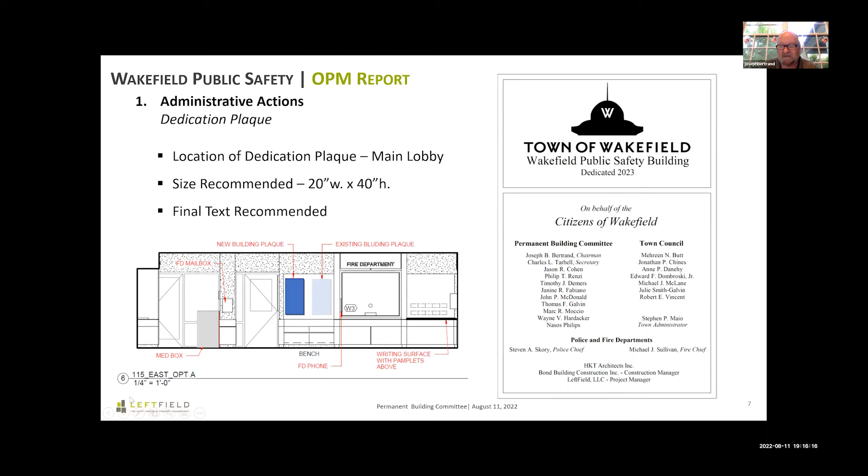And then just the next meeting that we have scheduled for the public safety building is September 8th. I don't see a need for us to meet along with the high school on August 25th, which is their next meeting, so we'll hold September 8th for the public safety building. Thank you.

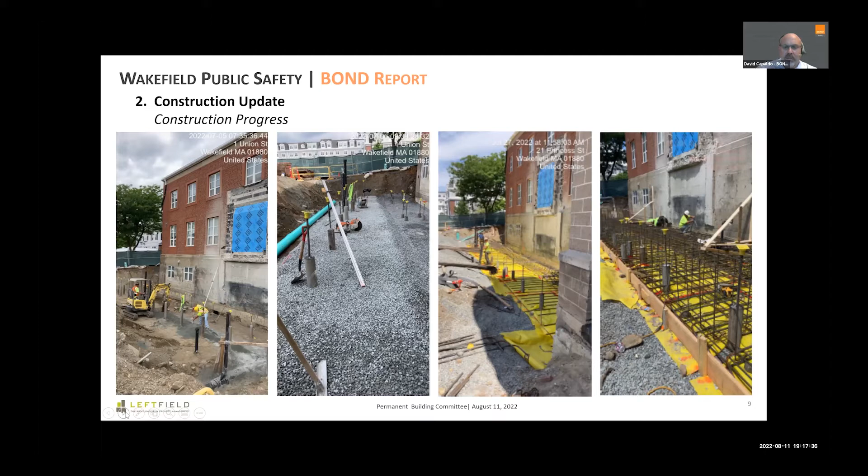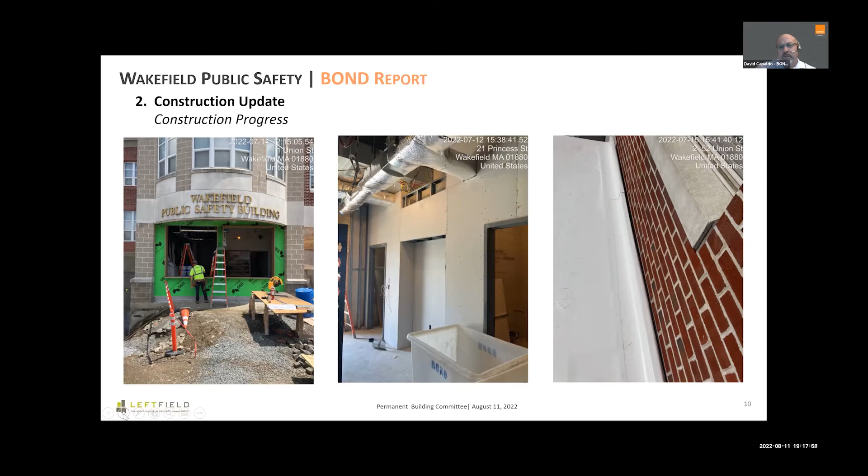Sure. So the last photo, I think he was trying to explain that was prep for the mud mat. That is essentially the first basement level slab on grade as well. Probably go to the next one. That's lobby progress, working from the outside, the first shot, inside showing drywall going in, and all the MEPs are up. And that last photo, I think, is the vestibule roof in place. Yep. Kind of an interesting shot there. And that's more interior progress at the lobby and dispatch areas as we were moving through the last few weeks.

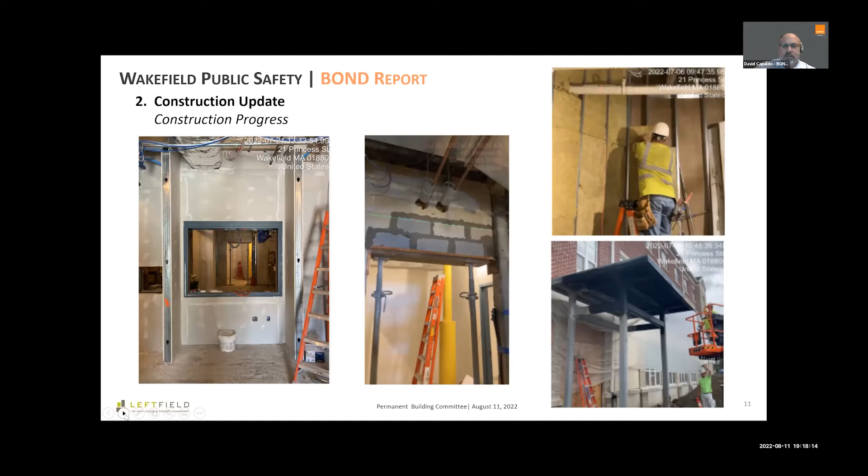And then from a big picture perspective, just to give a sense of where things are going. Right now, the addition is progressing very well. We're essentially right on track with where we had hoped to be based on our last schedule update. The lobby is progressing well also. But with the lobby, there's a couple of items that we've been trying to do some temporary workarounds on. And I think we'll definitely get the police department in the lobby roughly close to when we anticipated.

We may continue to use the temporary entrance for a couple additional weeks while we finish up the vestibule that had some lead time issues with the exterior glazing. So we're working as a team to come up with the right approach for that. But I think everybody on the team is on board with that progress. So we'll update at the next meeting exactly what the official opening of the front entry will be to the public.

All right, Dave, when do you think the turnover is going to be with the dispatch and everything? We're trying to figure out exactly when it makes the most sense for the police. We've got an electrical turnover. We have to maintain 911, that kind of thing. So I would say over the next 7 days, we'll probably have a few options to consider. We'll probably nail that down at our next meeting or so. And by the time we report back to the committee at this level, we'll have an absolute definitive date. But it's essentially close to the schedule we're on.

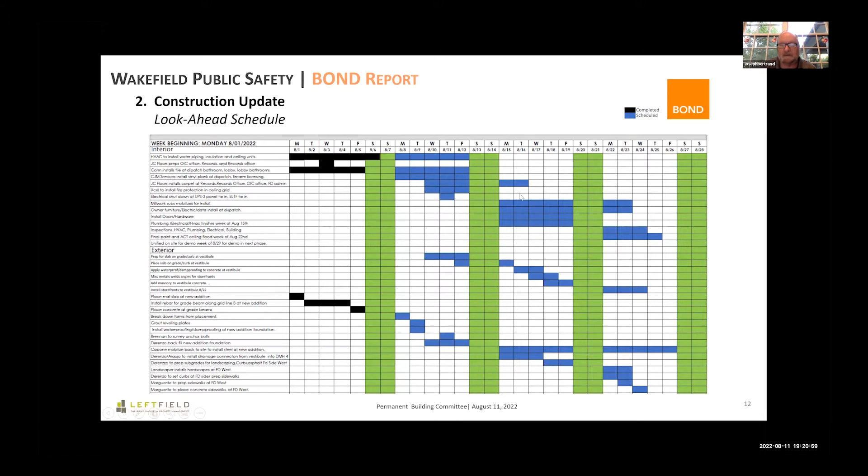Hearing none. Lynn, is there? That's it for the public safety building. Okay. Thank you, guys. Thanks. Good night. Thank you. All right.

Can you see the high school? Nope. Okay, hold on. I think I jumped out of sharing. Okay, can everybody see? Yep. Yes. Okay.

First up on the agenda is administrative actions. We have several of those to go through. Then SMMA will give us a schematic design progress review. Actually, at the end of the administrative actions, we'll turn it over and introduce Bond as the new CM for the project. And at the end, we'll do a quick schedule update.

So I'm going to let Frank start. Great, thanks everyone. So I'm Frank Hayes. I'm the president of Bond Building Construction, also an owner of the company, and thrilled to be selected for this project. I am a Wakefield resident. We've got 5, I think, Wakefield residents on our team, which is phenomenal, because the project means a lot to us and we all care and want to absolutely do the right thing. I'm going to say just a little bit about the company for those of you who don't know Bond, and then turn it over to Dave and Jerry, because getting to the logistics and how we're going to build this thing and show you that sequencing is really the interesting stuff.

But you can see our numbers on the screen there. We were established in 1906. We've got 6 offices throughout New England. Right now, we're running a bit over 750 employees. We do self-perform quite a bit. We are signatory to carpenters, laborers, operating engineers. So we do a lot of self-perform with our civil utility team, which could be valuable on this project, especially with the Hemlock Street alignment, maybe the culvert work, some early utilities, things like that. We also self-perform carpenter and labor trades.

And the way we look at this is if it can add value to the project, especially in this time of kind of labor shortage, then we bring it to bear. But obviously, that's all 100% transparent, and we don't force it down anyone's throat. It's there if it makes sense for the project. This will be our first high school project, and I think it's important to put that out there. We have an amazing team who has built every kind of space that this school actually contains, and we've done many projects of same size and scale, and very similar, but again, our first true high school. So wanted to just point that out. We're 100% comfortable with it, and looking forward to really getting to know the SMMA team.

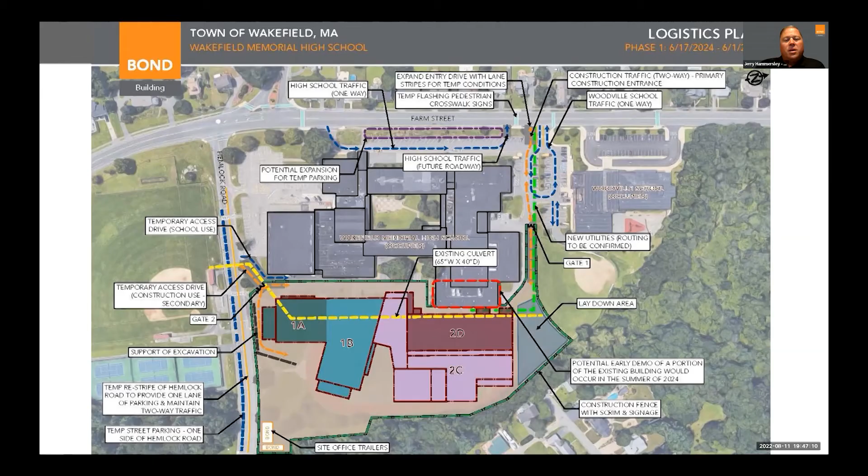Also addressed here is the traffic flow in and out of the site. So we plan to widen and potentially separate the curb cuts between Woodville and the high school to allow better flow, separating Woodville's traffic from the high school traffic, and it makes the drive a little bit wider for trucks to get in and out as well. So the road would only be used in that area outside of drop off and pickup times, similar to what we did at Galvin, to eliminate any disruption to students coming and going from school.

So we also addressed the sequence of how we plan to build the job, working from the Hemlock side of the site over towards the softball field. The building does account for most of the real estate on the site, so it's very tight. When we're establishing the site perimeter, we will address that kind of stuff as well. And then lastly, the Bond and LeftField trailers are up on the hill overlooking the site. So they are able to remain in one location throughout phase one by doing this. And then they'd be moved down to the bottom of the hill for phase two.

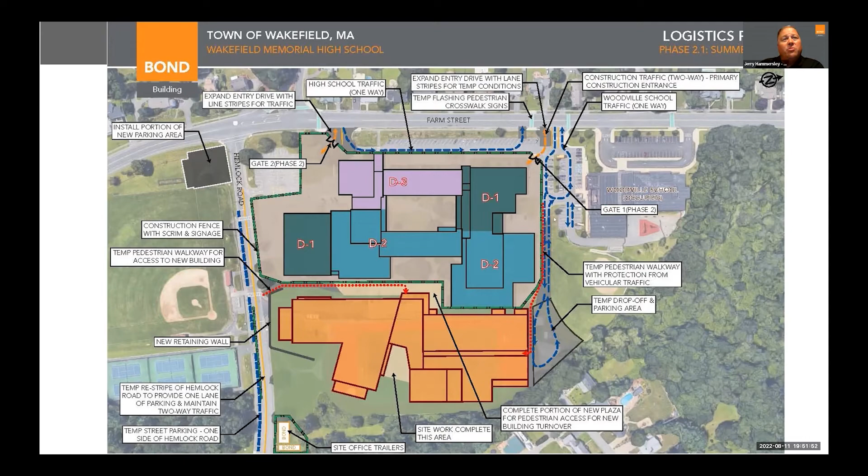So with this sequence, with the demolition sort of getting started, we would be working from the new building towards Farm Street. So we had to address student drop off here, putting the student drop off between the high school and Woodville, using what we did have as lay down area as a turnaround for the parents dropping off and picking up. And our suggestion here would be to utilize Hemlock Road for buses for the initial opening of school until we can get the new front plaza developed.

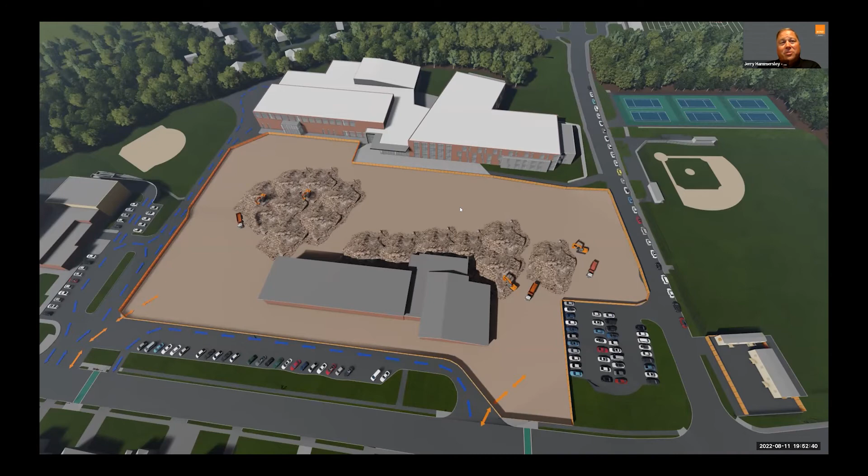This work starts in June of 26, first with abatement and the demolition of the existing building. Unfortunately, there's not enough time schedule-wise in the summer of 26 to completely remove the old building and then build the new plaza that creates the main entrance to the new building. So as we started the demolition work, we'd work our way from the inside out, making way for the new hardscape to be established and start that plaza construction in September of 26, and then complete that area ahead of the frost in November of 26, making it available for pickup and drop off, hopefully by mid-November.

At that time, drop off and pickup flow for both cars and buses could shift onto that new area, and this also gives back 68 new parking spaces for school use, and then the remaining spaces would be completed where that turnaround was. So there's 5 3D slides here that go through the demolition. The fourth shows the new plaza completed in November with the new Beasley track and field under construction. This will likely be started with the balance of the work finished in spring of 27 once the frost lifts. At that time, we would also be doing the balance of the remaining landscaping to complete the project, as we show in our final 3D slide here.

Dave? Great. Thanks, Jerry. One thing we're super excited about is we want to get the students involved, and we could do that in a whole bunch of ways. We did a little bit of it with Galvin. We have done a lot more with some of our more recent K-12 projects, and we look forward to working with Doug and the rest of the staff on the right ways to do that. We've got some thoughts and want to hear everybody's opinion on the best way to approach that. I'm looking forward to getting the students involved as well. Frank, you want to share some final thoughts before we turn it back over?

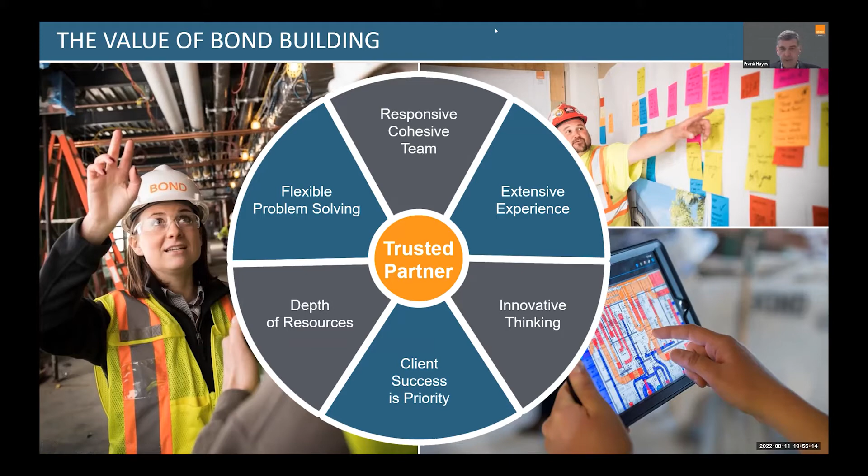Like I said, we put quite a bit of thought into this, and just want to reiterate what Jerry said: these are our thoughts, and we're looking forward to getting together with the team and talking through the details of each of these. We've got a whole bunch of other stuff percolating, and looking forward to starting up the meetings, figuring out the logistics, really figuring the schedule, getting some numbers to the design, and next steps in the approval process. So thank you. Thanks, Frank. Thank you, Dave, Jerry.

Any questions or comments for Bond? Well, that'll be your easiest meeting you'll have. We'll take it. We'll take it.

Joe, I just have one comment. Thanks, guys. Those 3D slides were really cool. As we develop the time frames, I imagine those will be used to help tell the story to the public, showing the phasing. It might be really helpful to have estimated dates on those. I know we won't be wed to them, and putting anything out there is dangerous, but it might really help people understand the timing. To be able to see like October 25, November 25 on the slide. I think that would be helpful.

So John, we do all this stuff in-house. We've got a really talented crew who does this 3D work, and we were thinking the exact same thing, that as the schedule gets locked down and we figure out the exact sequence, we would modify those, throw the date on it, put it out there and let people get a sense of how it's going to progress.

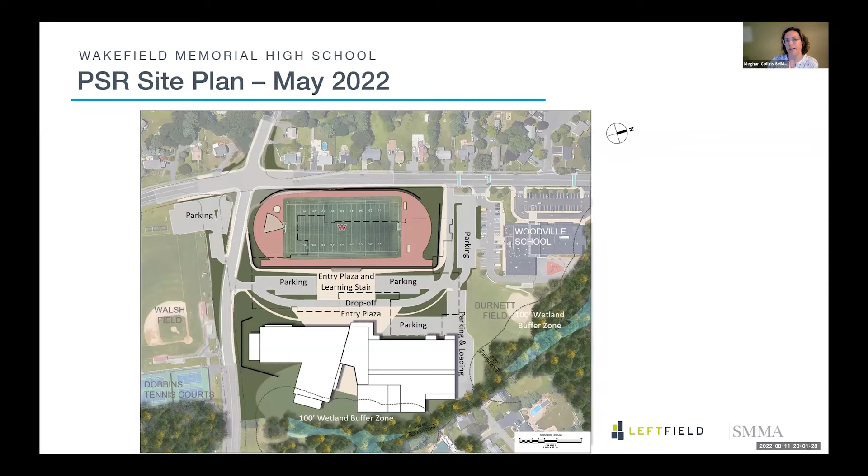This is the PSR site plan. Just wanted to bring it around, though Bond did a very nice job of illustrating it in 3D. But this is where we left off for the PSR, what we submitted to the MSBA. And so we've been going through a process of a lot of design, a lot of placing of the major elements, those being the building, vehicular circulation, the pedestrian plaza that's bridging the track and field and the building, obviously the track and field, and parking.

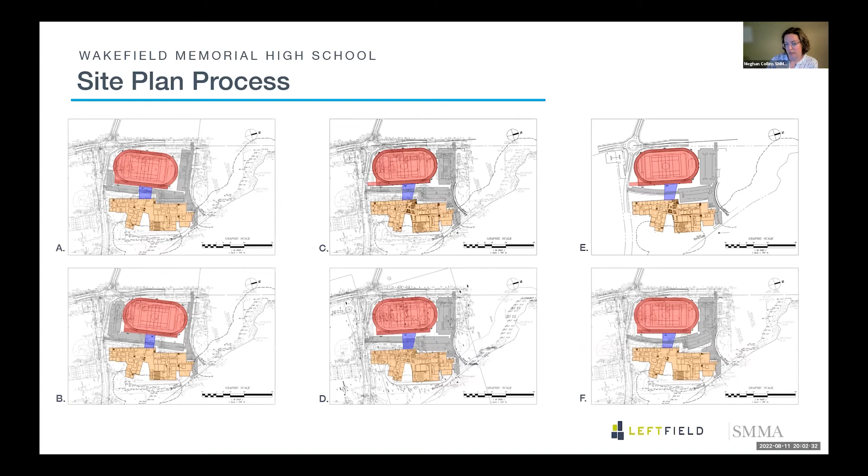And so we've put parking on the north, we put parking on the south, we put parking to the east. We've tried round roadways and straight roadways, angled tracks, reversing the angle of tracks. This is just a few examples of how much we've been trying to push and pull the elements of program that are to be included with this site. And that's all to say that we are looking for a balance. Balance on the site is going to be key to accomplishing the priorities and also achieving an aesthetically pleasing site plan.

So the elements that we're really working with here are the roadway realignment. We met with the town and DCR, and we've heard that there's an early preference for the roundabout. The roundabout is also going to have the greatest impact on our site, so that is the configuration that we are working with right now. Another one is the building placement. As Meghan said, we looked at angling it slightly one way or the other to see how we can nestle it into the site, making the least impact on maintaining the existing building and the wetlands and things of that nature.

As part of our planning, we sent out a student transportation survey to the students of the high school. We also did a faculty staff survey asking about modes of transportation to school, and the questions included times of arrival, times of departure, transportation types, and then there were some aspirational questions about other multimodal possibilities for students getting to school. We will be using the information we gathered to help design the site. We've also passed this information to the Wakefield master planning group, so they have it as well.

But basically the key takeaways are that students are open to using alternative modes of transport to school, and so we will include those. And teachers also need parking to make sure they are able to get to and from school as well. And we need to make sure we're maintaining parking during construction.

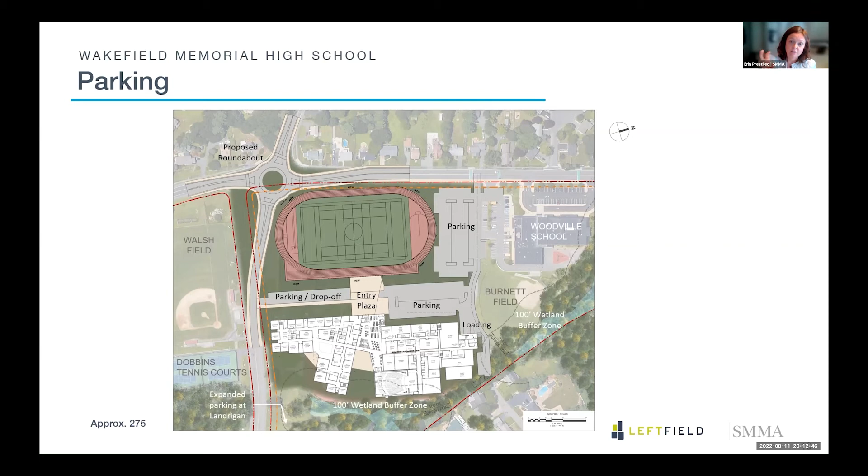We are looking into opportunities to expand parking at Landrigan. We're currently working with the town to understand any restrictions that would point us in another direction there. But to make existing parking facilities at Landrigan more efficient, our thoughts are it could be done early, and then that could serve to offset during construction as well as provide after construction is over. The goal for us is always to provide what is there currently during construction. So definitely more to come on parking quantity.

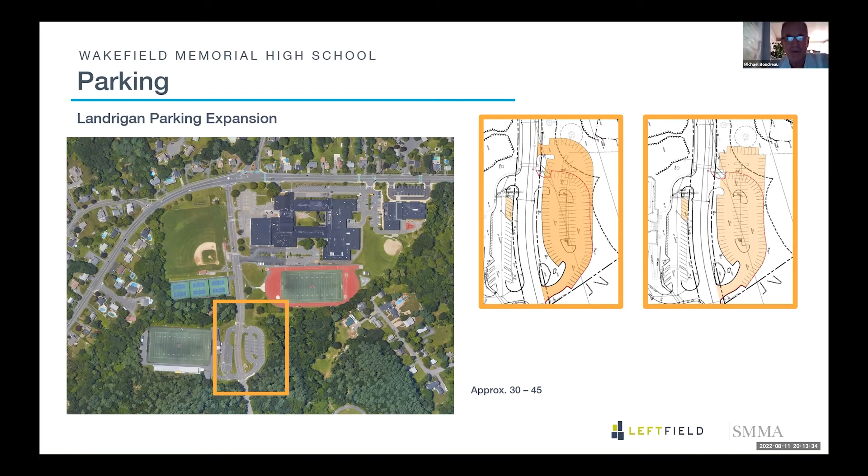Erin, could I ask you a question? Yeah. I'm sorry, Joe. Could you go back to the proposed layout design for just a minute, please? Perfect. So I had a question about the roundabout. I apologize if you covered this already, but I have some trepidation about a roundabout for high school kids who are just learning how to drive. Navigating a roundabout, even for adults, can be challenging sometimes versus, say, a traffic light. So I'm curious how you came up with that proposal.

So we're actually studying both right now. Meghan had commented that we met with the town and DCR to talk about moving forward and how we decide. There's going to be a special traffic advisory commission meeting scheduled at the end of the month, where we present this project and Metro Tech will be before that commission and present the analysis on these two approaches. I think the town's goals are traffic calming and also considering long-term maintenance, also knowing there is no roundabout currently in town. So there's a lot to consider.

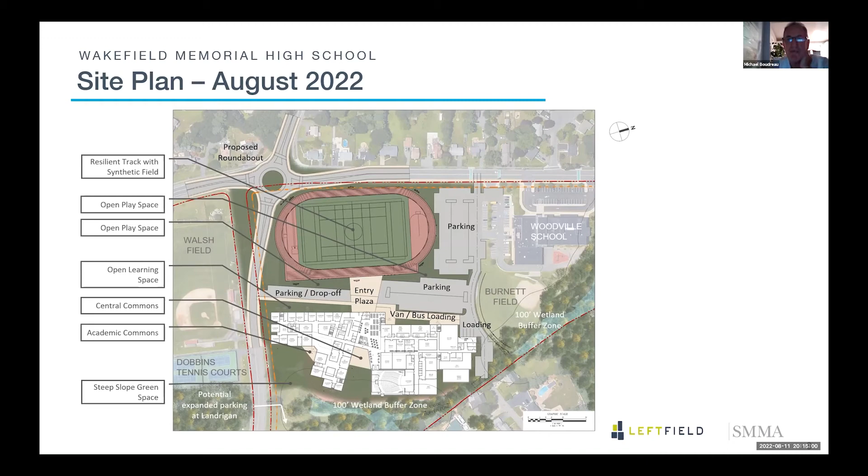I think the town prefers that the same approach be taken at both Metro Tech's new driveway and this intersection. But it's being studied by our consultant and by Metro Tech's consultant, and then we'll come together and meet with the traffic advisory committee in just a few weeks, actually. Great, thank you. Perfect. Sorry if I missed it. No, that's okay. Thanks, Joe. No problem.

So we've talked about grade transitions and the slopes that are on site. We have a really great opportunity to use those grade transitions to create beneficial spaces, using walls, sloped walkways, and even bridges.

We will have needs for bioswales, and honestly these spaces can be really beautiful, building in walls to cut the grade and become seats, or become planting areas, or become areas to mitigate water on site—all really great and aesthetically pleasing ways.

Hopefully they will help us reduce the aesthetic we had talked about early on, which was just a big expanse of wall surface. So we're really looking to cut these spaces into really usable, beautiful, aesthetically pleasing spaces.

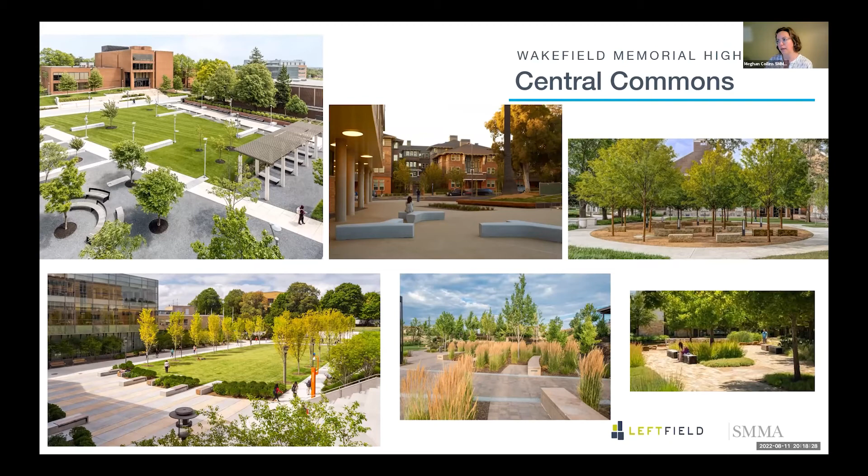And then we have all of those great green spaces that Laura was talking about, in the interstitial spaces between our major elements.

We'll be looking at including different types of modalities, from subtle things like paver hopscotch—a very subtle way of incorporating play—to all sorts of different types of slope play. We've heard that multi-generational families will be coming to enjoy the recreation at the school, so we're looking to incorporate ways for all family members to have enjoyment on the site.

Erin mentioned that we had spoken with DPW and the school facilities director, Tim. We learned a lot about how they operate and maintain the school sites, which helps us understand how we want to use materials and plantings.

In general, we're looking to use materials that bring a more natural feel. You have the wetlands nearby and some wooded space, so we want to bring elements of that back into the site. You'll see that in some of the stormwater areas as well.

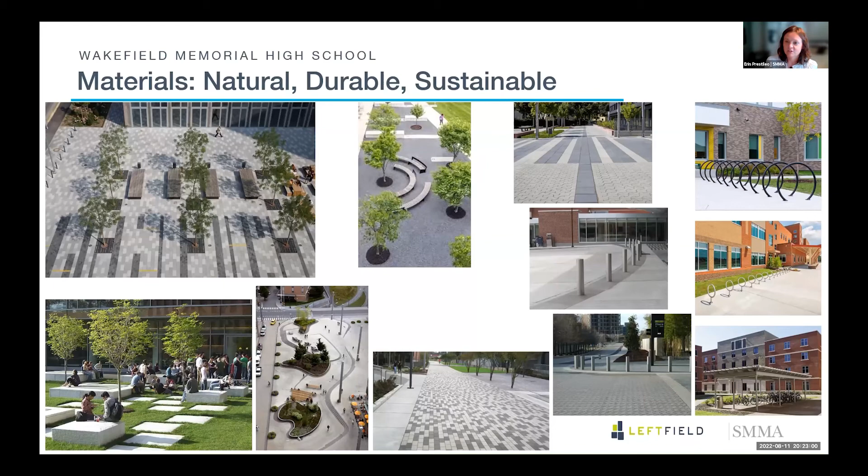So hearing none, shall we move on? Okay. So I guess we wanted to bring up the track and field program because up till this week, we have been talking about including a track and field program that is identical to what is already at the property. So a 6-lane track and a small bleachers, maybe seating for 100, and lights.

And so we sent out notification to the school to confirm that that was accurate. And we heard back from the AD that they would like to include some additional programming that we have not planned for yet. And we're looking for direction as to whether we should continue to study going to, I guess I should go over what he was asking for first, right?

We were asked to consider expanding to an 8-lane track. And we were asked to include spectator seating in excess of 600 plus people. And we were asked to consider storage. We already were considering storage, and we will be clarifying how much additional storage is desired. But I guess, Laura, do you want to talk about this next slide? Sure.

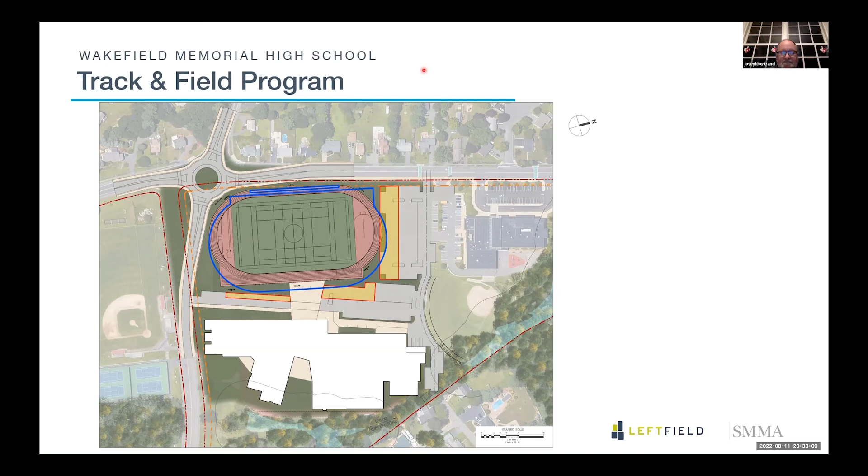Is this the end of SMMA's presentation? It is the end of SMMA's. Thank you. All right, then I'm going to share. What? I said I'm going to share the last 2 slides that I have, if you don't mind. I just wanted to say one thing on the track.

I completely, like Chip said, I understand Brendan asking for that stuff, right? This is the time to do it. Maybe it wasn't done through the right channel of this process, but it brings up a good point. Maybe if the expanded track isn't feasible, is some of what he's asking for feasible?

In my head, I'm thinking about the stands. If there's something a little bit more substantial than what's there right now, that would be great, I think, for usability and the public going to things there, because there's no seating there now. And as parents going to little kids' soccer games or going to watch kids play lacrosse, you're not allowed to bring your seats onto the track field or anything like that.

So if there was some ability to expand seating, I can see that being an additive thing that would be good to look into, just as part of this, because while we did say we were going to replicate it when we moved the field from the back of the school to the front, I think having some improvements would be something we should think about. So that's all.